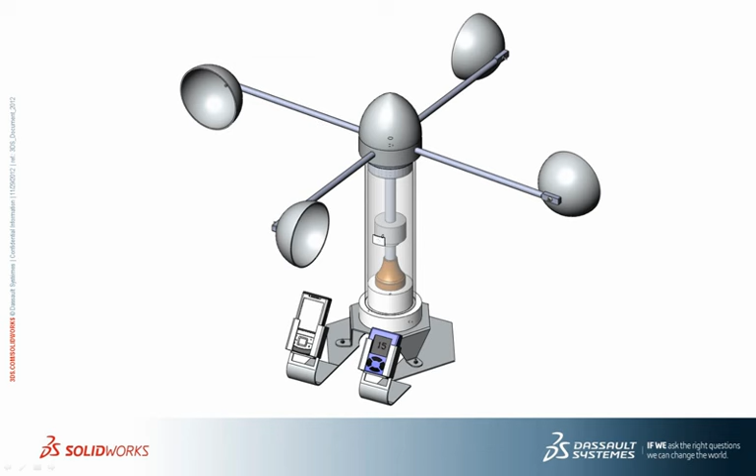In this section you'll learn about subassemblies and the advantages of using them. You'll see the difference between an assembly composed of many parts and one composed of subassemblies. Components from the windmill assembly will be used to illustrate these concepts.

This windmill contains a component called a dynamo, which is essentially a generator. This dynamo contains 8 different parts. You can organize these parts by making a subassembly, which is simply a collection of parts.

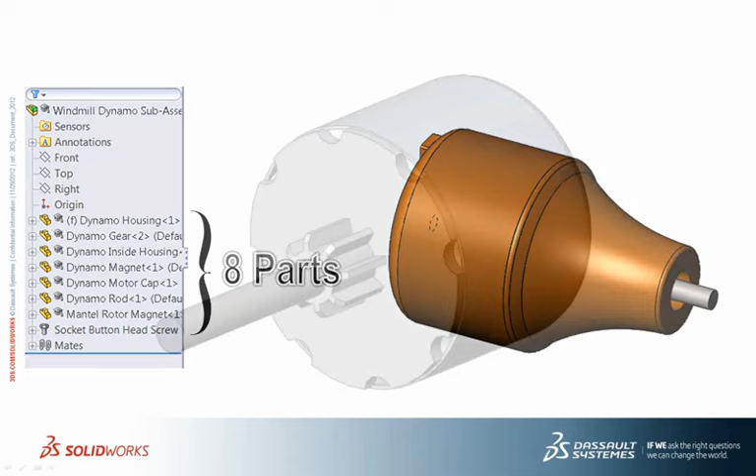In the first portion of this lesson, you'll create a subassembly for the rotor component, and then bring together more parts to build a well-structured dynamo assembly.

As discussed earlier, you'll first build the rotor subassembly of the dynamo. Click New and select Assembly.

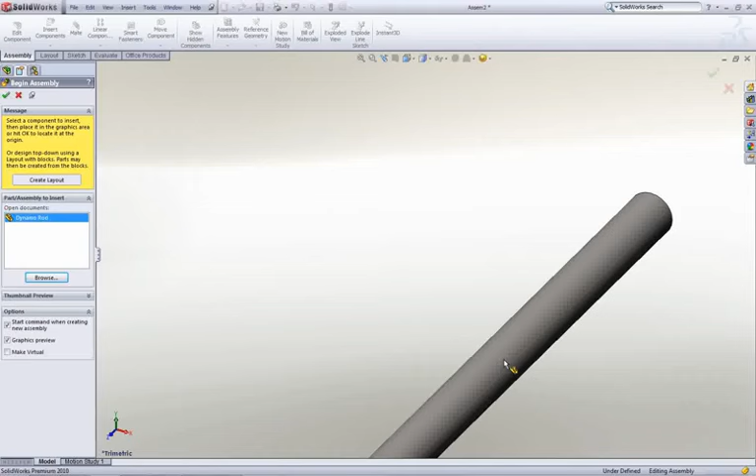Pin down the Property Manager and click Browse to add the 4 parts that will make up this subassembly. These are the dynamo rod, the dynamo magnet, the dynamo gear, and the mantel rotor magnet.

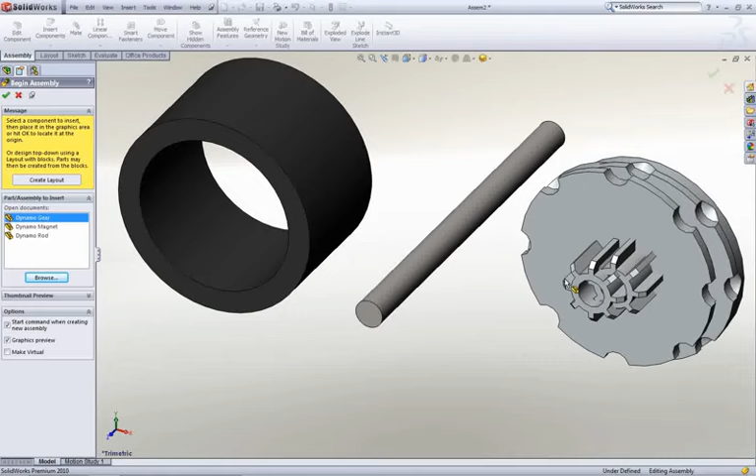Once the parts have been added, click the green check mark. In the previous sections, you created an assembly by mating parts together. A subassembly is created exactly the same way.

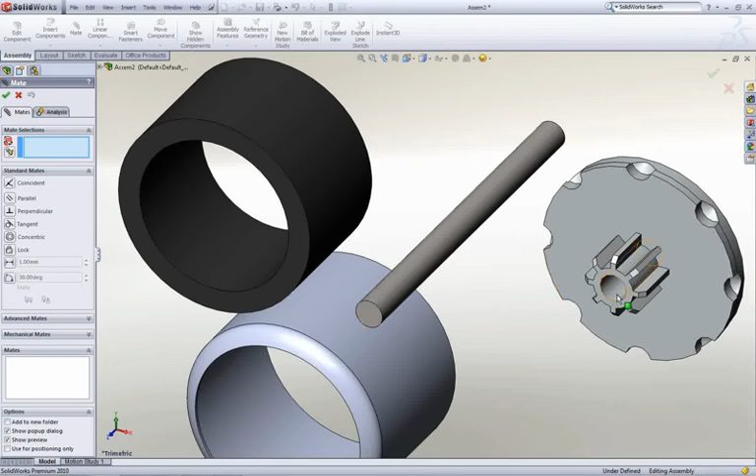Begin by creating a concentric mate between this part and the rod. Click the green check mark to apply the mate.

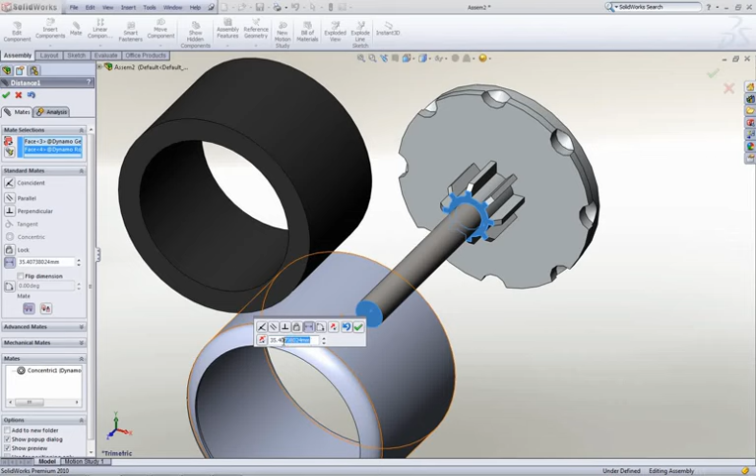Next, create a distance mate between the 2 front faces and set the distance to 30 millimeters. Click the green check mark to apply the changes.

Notice the 2 components can still rotate relative to each other. To lock them together, you need to create a coincident mate between the right planes of each part.

Expand the Feature Manager design tree, then expand the 2 parts and select the right plane for both, and select Coincident. Now the 2 parts will not rotate relative to each other.

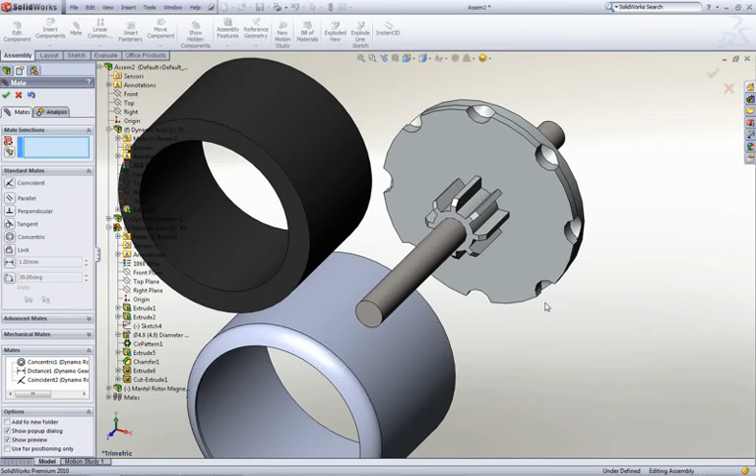Next, create a concentric mate between the magnet and the rod. Then, create a coincident mate between the front face of the magnet and the back face of this part.

Similar to the previous step, create a coincident mate between the right plane of the rod and the right plane of the magnet.

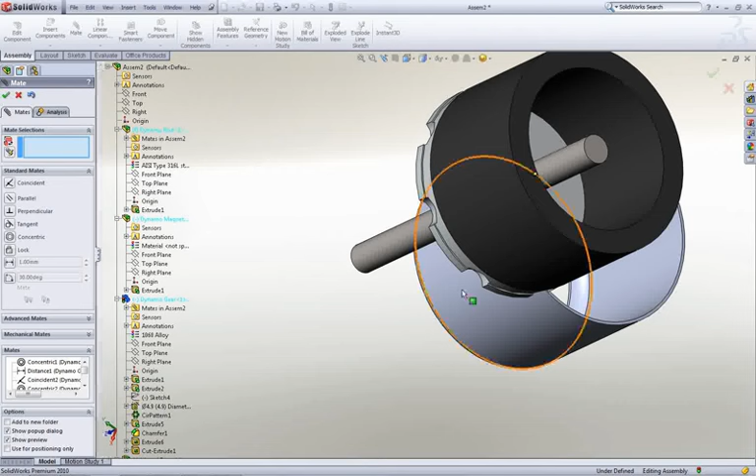The last part that requires mating is this shell. Create a concentric mate between the shell and the rod. Since the shell is facing the wrong direction, click Flip Mate Alignment to correct its orientation.

Next, create a coincident mate between this small edge on the gear and the front face of the shell.

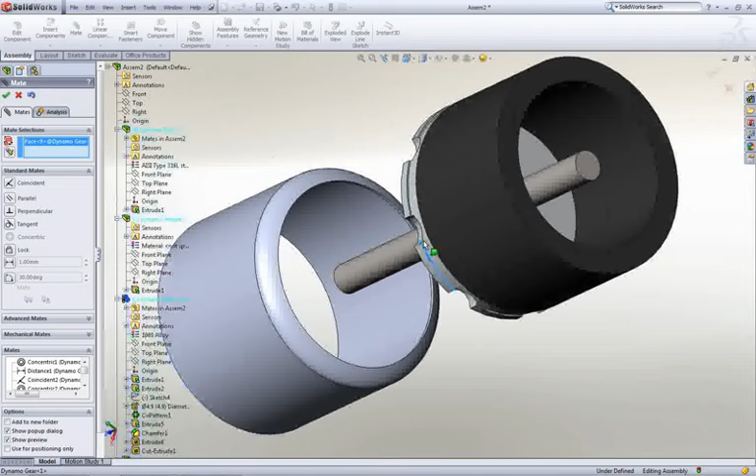Again, create a coincident mate between the right plane of the rod and the right plane of the shell.

Now you've created a subassembly for the rotor. Save it as Windmill Dynamo Rotor, and you are ready to use this in the dynamo assembly.

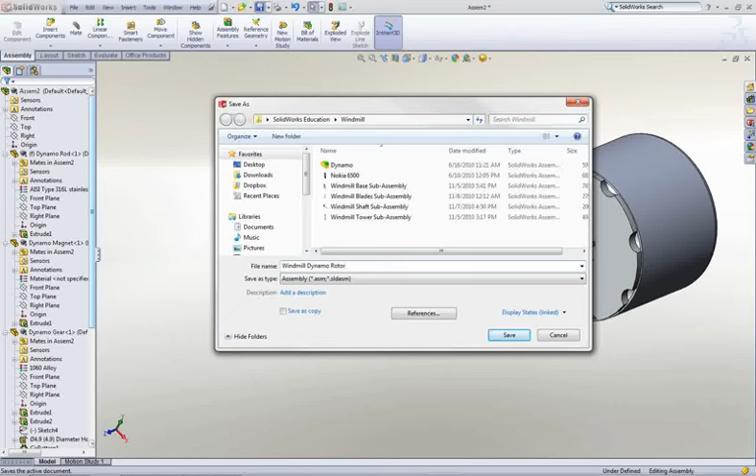Since the dynamo is just another assembly within the windmill assembly, it is also technically a subassembly. So you will now use the rotor subassembly to build the dynamo subassembly.

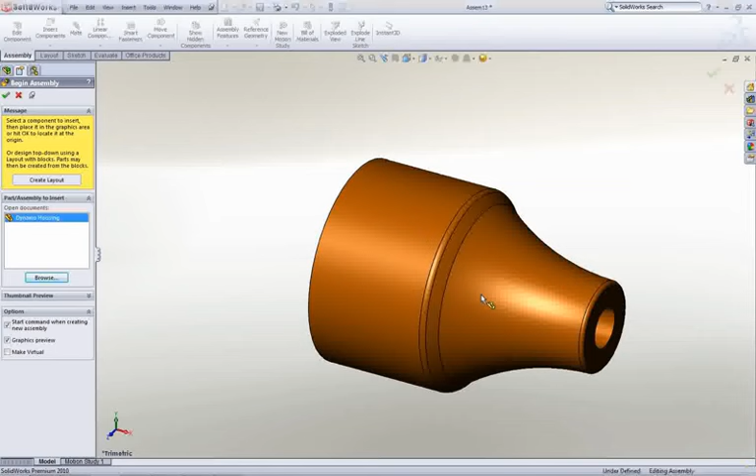Start a new assembly. Pin down the property manager and add the dynamo housing, the dynamo inside housing, motor cap, and M4 screw from the provided parts.

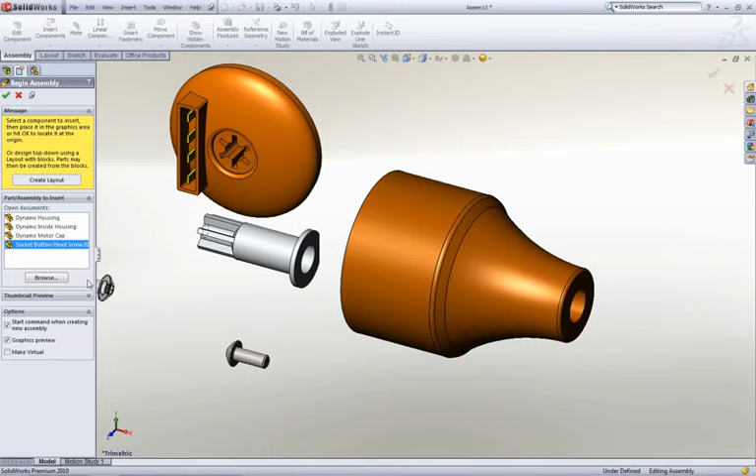As well as the rotor subassembly you just created. To do this, ensure that you select all files at the bottom of the open window.

Begin by creating a concentric mate between the circular surfaces of the inner housing and the rotor subassembly.

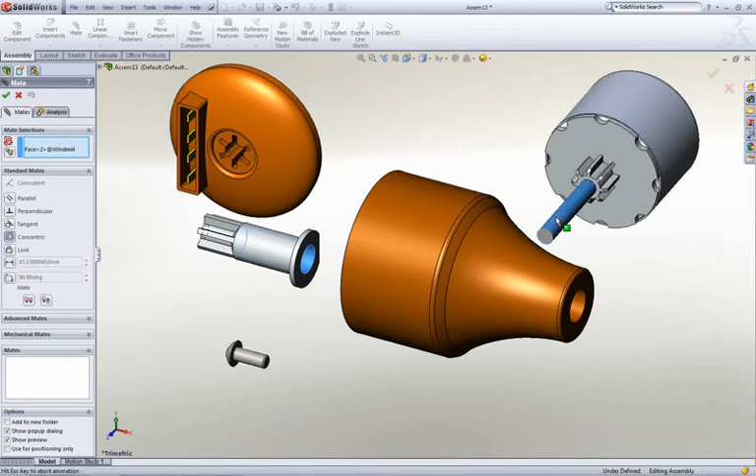Now create a coincident mate between the top face of the inner housing and the inner surface of the rotor subassembly.

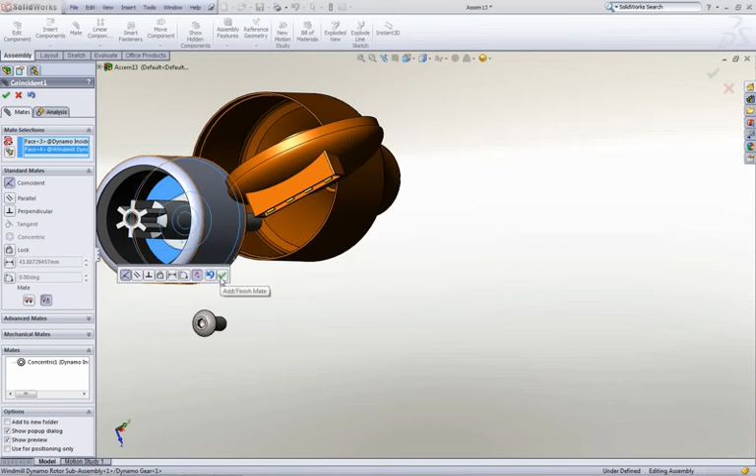Create another concentric mate, this time between the rear cover and the housing. Make one more concentric mate between the rotor subassembly and the housing.

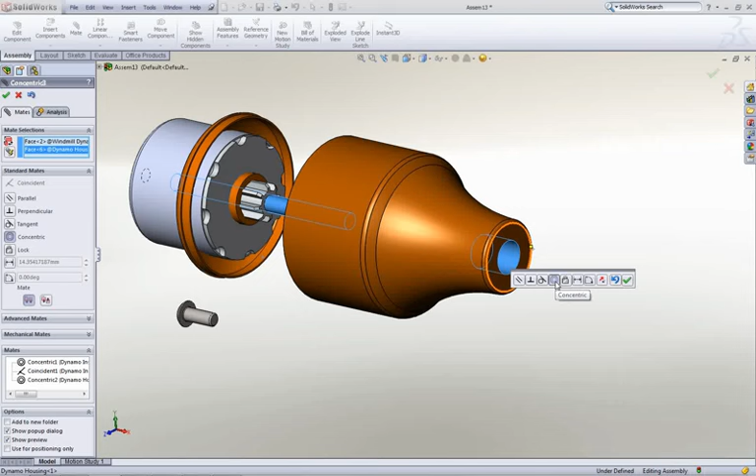Next, create a coincident mate between the front face of the rotor gear and this inner surface of the housing.

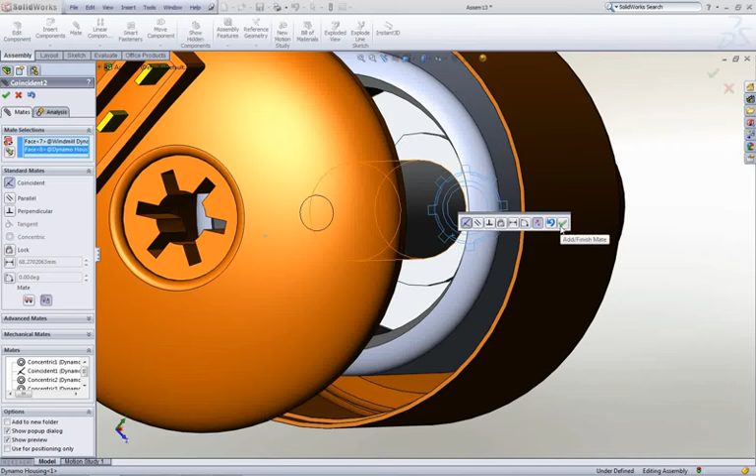Finally, create a coincident mate between the outer rear face of the housing and the rear cover. Make sure the gears line up at the rear by adding a coincident mate.

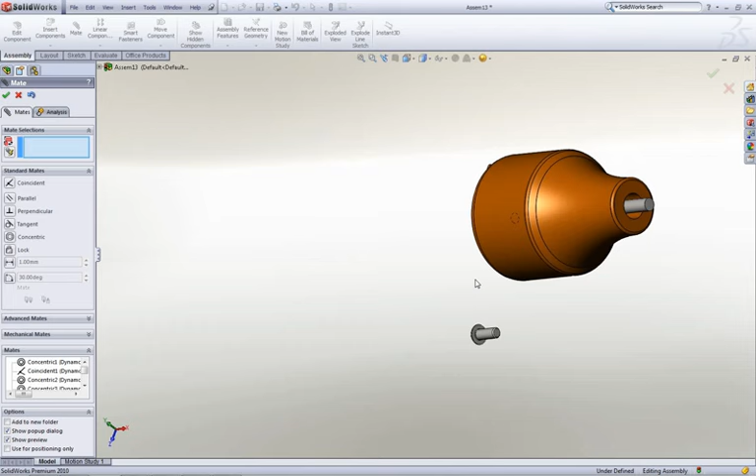The only thing left to do is to place the screw. Create a concentric mate between these two circular surfaces.

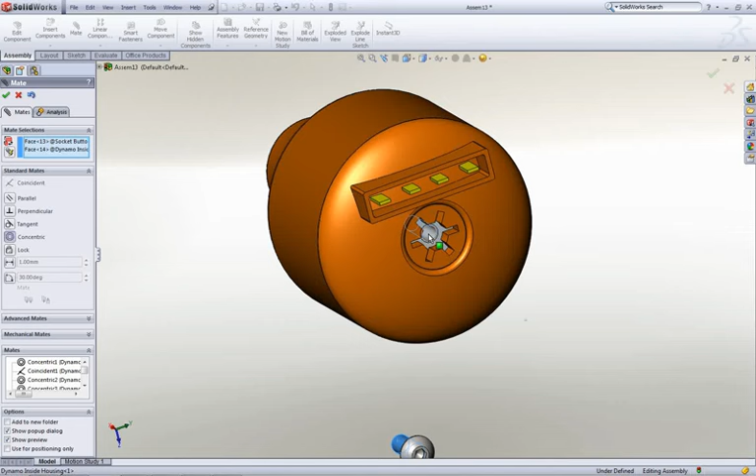And a coincident mate between the surface of the rear cover and the inner surface of the screw. Lastly, add a coincident mate between a plane of the screw and a plane of the housing.

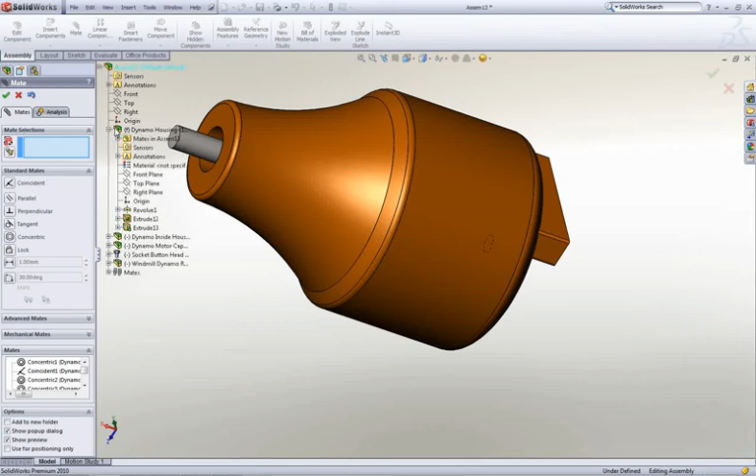This subassembly is now complete. Save it as Dynamo Subassembly.

In this video, you learned about how to make a subassembly and insert it into an existing assembly. You also learned about the advantages of using good assembly structure and its relevance to the engineering design process.